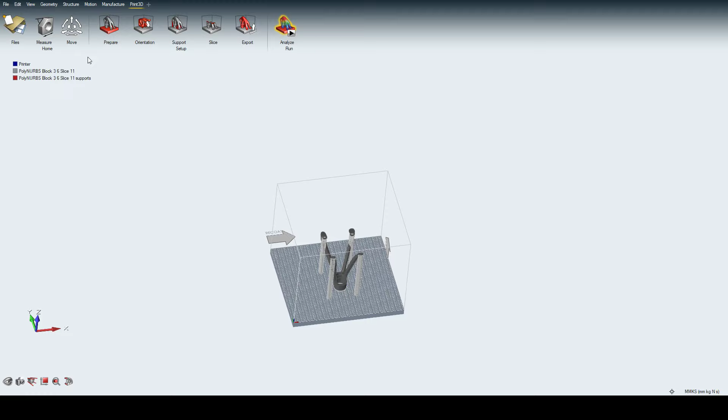Okay, and once you are happy with that, you can go for simulating this whole printing process. What you need to define is velocity, laser power, power reduction, and some more parameters, and you can also adjust between speed and accuracy over here. And after you run this simulation, you will be able to see. Let me show the results over here.

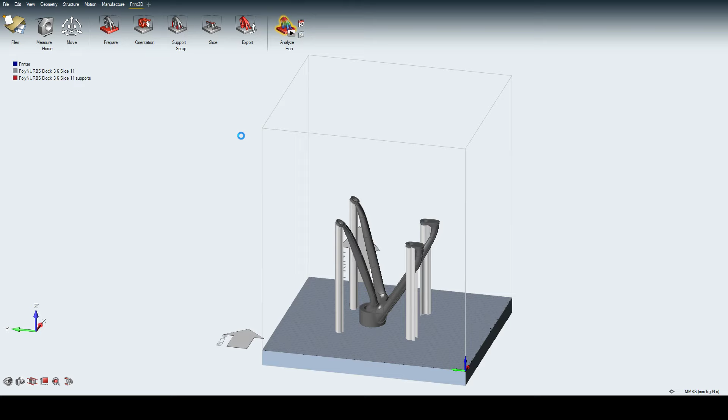Okay, so this is the result. So it's just loading the results in the background, because this printing simulation takes a longer time, so it creates quite a big file, and if you reload, it takes some time to load. So that's the process it is doing. In the back end, it is trying to pull out all the result data and create those contours for this particular example. And it always saves the required information for this particular part.

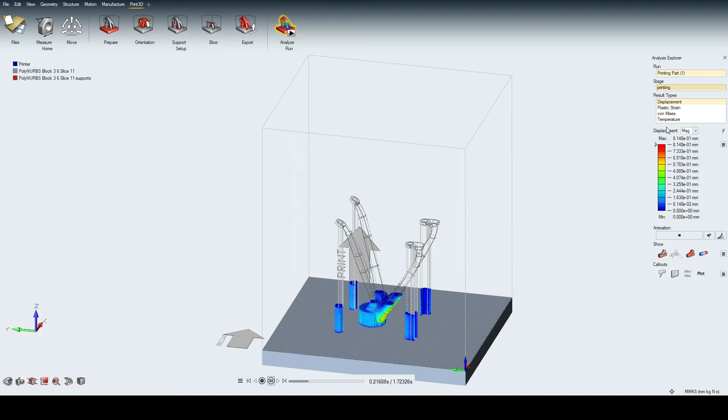And there is another feature which is a run history. If you see it over here, it helps you bring back any of the results you did previously. So if you see, this is what it does. It starts printing, and in each layer, while printing, it gives you the respective displacement, strain, von Mises stress, as well as temperature values.

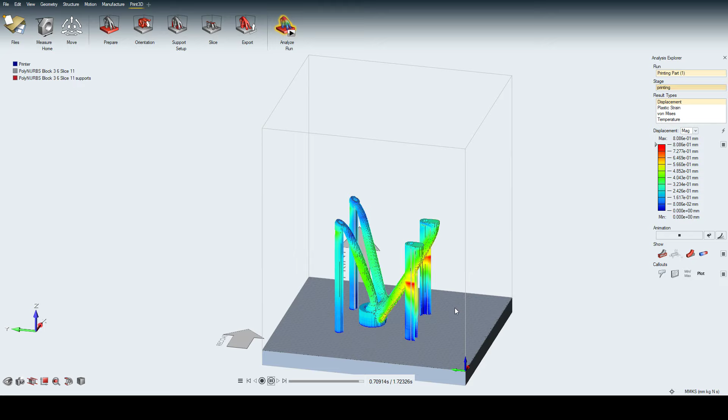Okay, and this does not end when the printing ends; after printing it goes for cooling, and after cooling it goes for support removal. So all those three stages are covered, and if you see the animation, after some time the support will be removed. And if you observe very closely, let's take a particular example over here. I am tracking the displacement, and let's go some steps down.

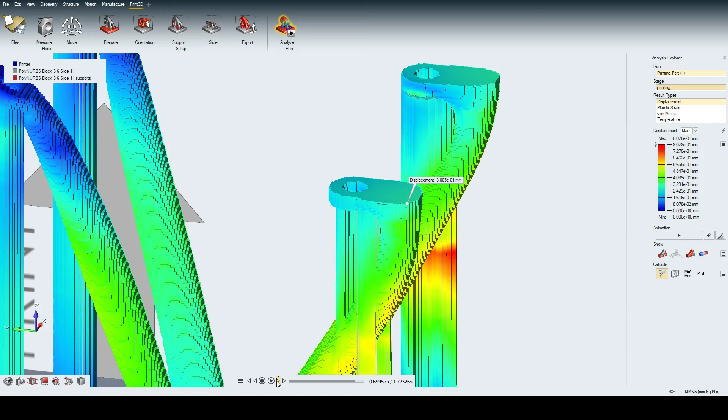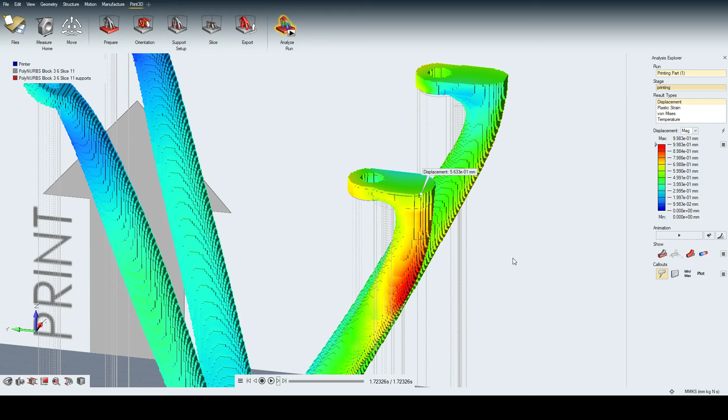Okay, so this is my printing. So my printing is complete now. We'll see that displacement is around 0.3 mm. Now if we go some steps further, we'll see there is a change in the displacement value as it is getting cooled. Okay, and you would expect further change when the support is removed. So you'll see that it has changed a lot.

Okay, so after you are happy with this result, you can export this model in either CLI or STL format and send it for printing. And what I'll do in the next video is take this STL export and use my small FDM printer, which is plastic. Of course, this is not metal, but the aim here is to gain as much insight as possible for the printing, and we'll also see what problems you face other than whatever has been simulated, and how to solve those problems